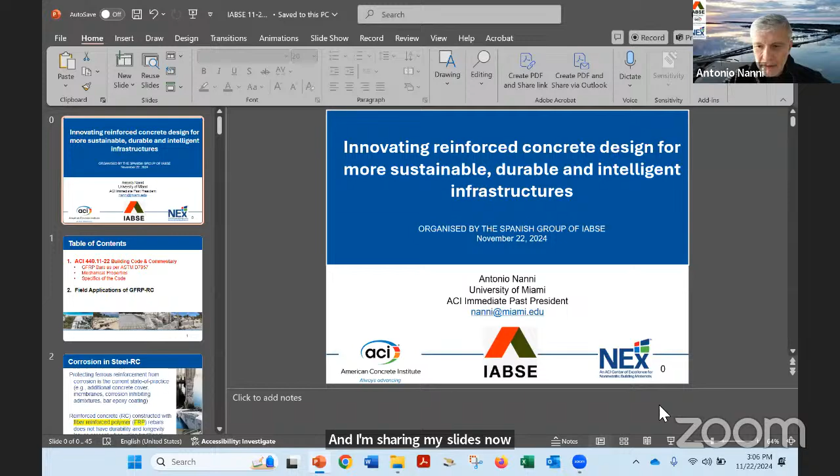The topic that was assigned to me is to speak a little bit about the international perspective, and I will do that by touching two topics. One, the code itself, ACI 440.11-22, and then to speak about some of the field applications that I think are representative of case studies that could be useful to the audience today.

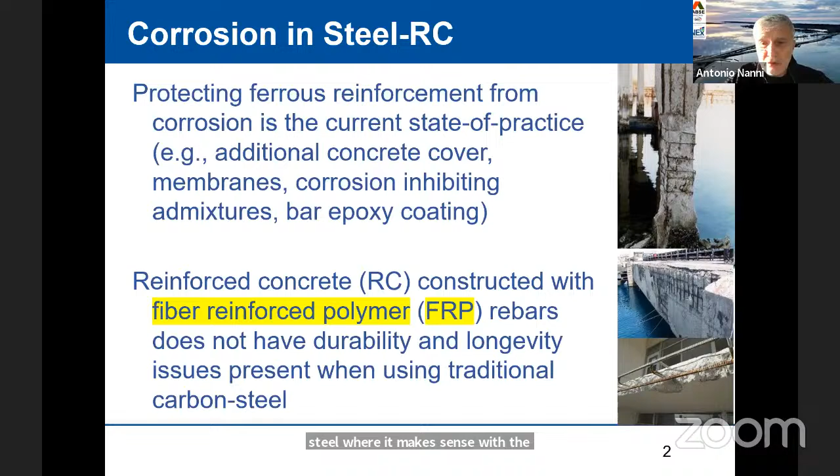So why do we use FRP? The obvious reason is we have been trying to protect the steel reinforcement in different ways. And you see them listed here: concrete cover, membranes, corrosion inhibiting admixtures, covering the bars with epoxy. But now the idea is, let's solve the problem at its origin. Let's replace the steel where it makes sense with the composite reinforcement so that the durability and longevity issues are addressed.

Where are the most interesting applications of these materials? Obviously, when there is corrosion due to chlorides, also when the concrete has a low pH, and certainly in structures where the minimum concrete cover could be reduced. This is, for example, an interesting application in the precast industry.

There are two other fields of application that may not be of great interest to the audience today, but are worth mentioning. The first one is where we require electromagnetic transparency, for example, in MRI type of application. Certainly when we require thermal non-conductivity, again, if we look at the precast industry, this could be of interest in the area of panels, where we want to avoid thermal bridging. And finally, in the geotechnical applications where we have the soft eyes in the walls where the TBM, the tunnel boring machine, needs to start the excavation.

Today, we will focus really only on one type of FRP, and in particular GFRP, glass fiber reinforced polymers. And in this particular case, we refer to two types of constituents. The first one is the fiber itself, which is E-CR. So is the traditional e-glass with the formulation to be more corrosion resistant. And the resin is a vinyl ester, a thermoset that has demonstrated over the course of the years a satisfactory, more than satisfactory performance.

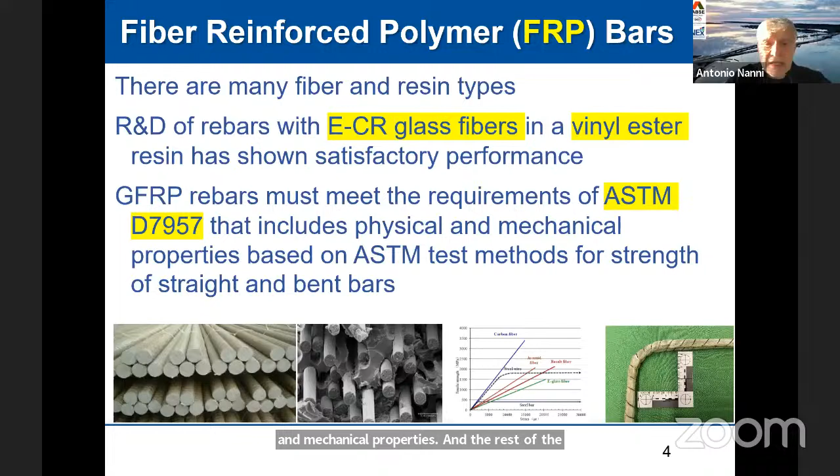Why the selection of these two materials in particular is because in the code that I will mention in a little while, we make reference to a material specification in ASTM, and in particular, as you see here, ASTM D7957. So the performance of GFRP bars is specified both in terms of physical and mechanical properties, and the rest of the conversation today, at least from my perspective, is related to this type of composite.

The GFRP bars have been around for quite some time, I would say more than 30 years. They also started with e-glass, now we are at E-CR. We started with the polyester, now we use vinyl esters. And the reason is because we are paying a lot of attention also to the durability. What is interesting, and you can see in the pictures on the right-hand side of my slide, is the shape of these bars.

Unfortunately, we have not arrived at a standardized configuration. And so you can see different surface profiles. They could be helically wrapped, ribbed, sand coated, grooved. And the reason is obvious. We are all reinforced concrete people. We understand that there has to be a bond between the reinforcement and the concrete for the transfer of stresses. And therefore, this is a key issue. Every manufacturer does it in a slightly different way, but we have to ensure the quality of the bond, and this will be one of the test methods and limits that the ASTM D7957 provides.

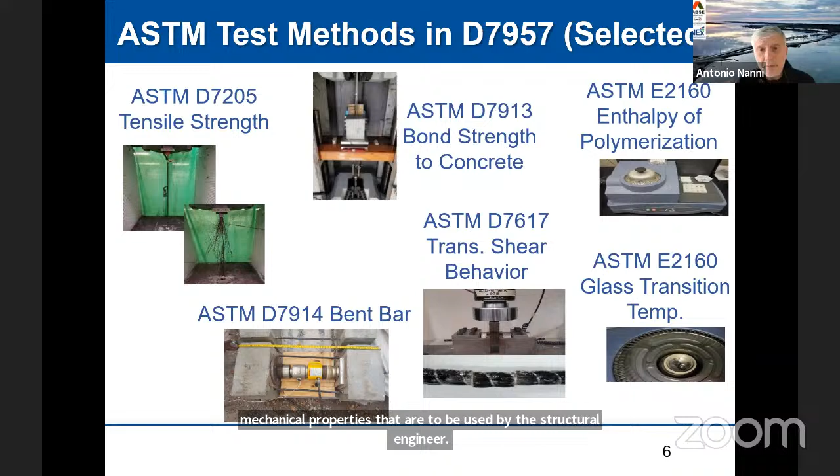The test methods that are indicated in the D7957 are various, and here you can see a selection. Starting from the left-hand side, the tensile strength that gives us the ability not only to determine the capacity in tension of these materials, to the far right, where is a test that maybe civil engineers are not very familiar with, which is the enthalpy of polymerization. So these are all very important tests to determine not only the mechanical properties that are to be used by the structural engineer, but also the physical mechanical properties that guarantee the quality of the reinforcement.

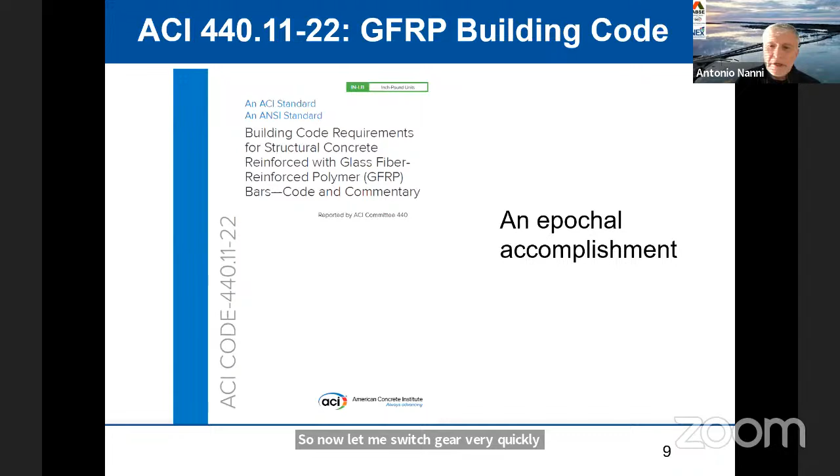So now let me switch gear very quickly to the building code. We consider this an epochal accomplishment. We published this in 2022. I know that the audience today is primarily more interested maybe in bridges and structures as well, but I think that the reference to this code is important because it's really written in mandatory language and is adopted also by IBC, the model code International Building Code.

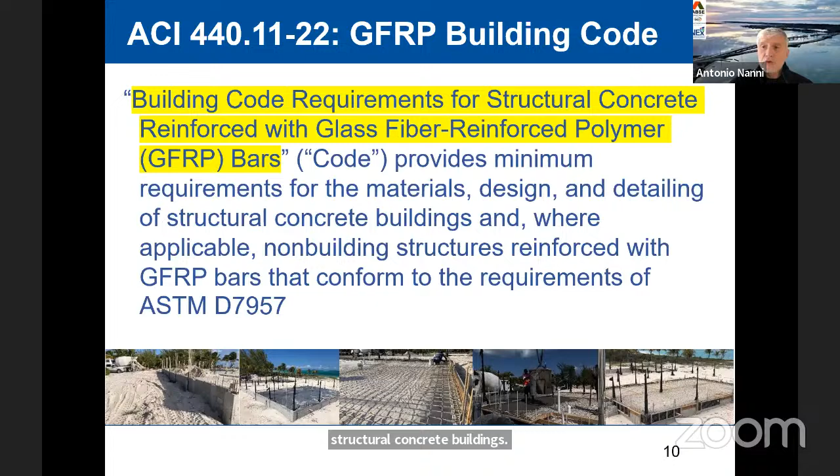Materials such as GFRP composites are linear elastic to failure. They certainly are not elastoplastic like steel, and therefore their application in seismic zones due to the ductility is an issue that needs to be addressed. And the way that we do it in ACI, but I would say not only in ACI, but the Canadian standards as well as others, is to address this from a perspective of deformability, that we define as the ability of a member to undergo large displacement prior to failure.

If one day you wish to attend a webinar where we go into the details of what this means in terms of design, I will be delighted to help you with that.

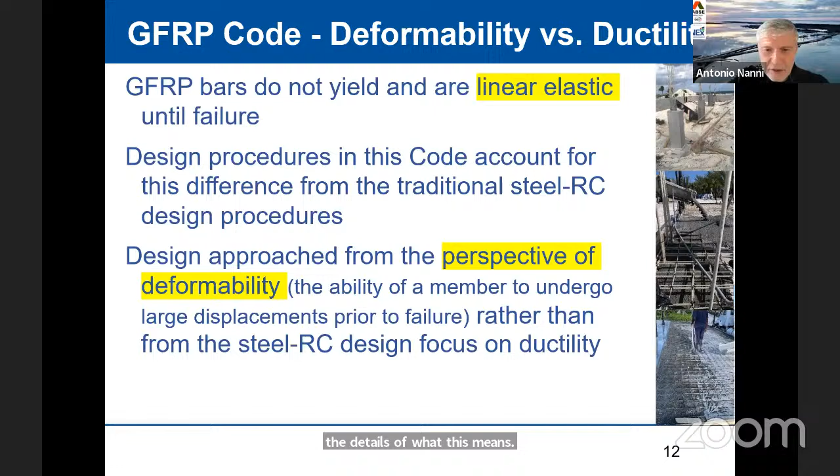And the other thing that you need to recognize is that the serviceability design takes a primary role also in the use of GFRP-RC, because the modulus of elasticity of these bars is between 1/4 and 1/3 of that of steel. And this has implications, particularly on deflections.

So with this, it took me just about 10 minutes to finish my first topic. I want to take you through some field applications. I selected 4 that I think are representative of what has been done in the last few years.

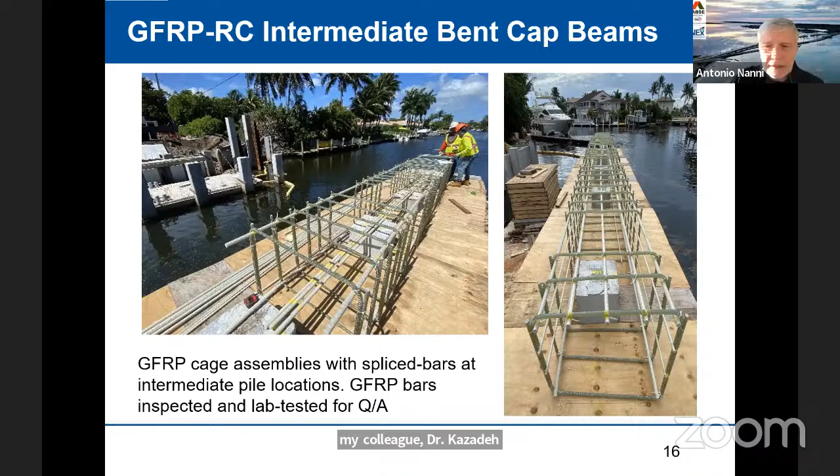Here you see the complete assembly of the cages, the casting completed for the pile caps. In this picture, particularly paying attention to the right-hand side, you see the GFRP reinforcement for the continuous flat slab. This is the first case. We typically have designed bridges that were simply supported slabs or girders. In this case, it's just a continuous flat slab.

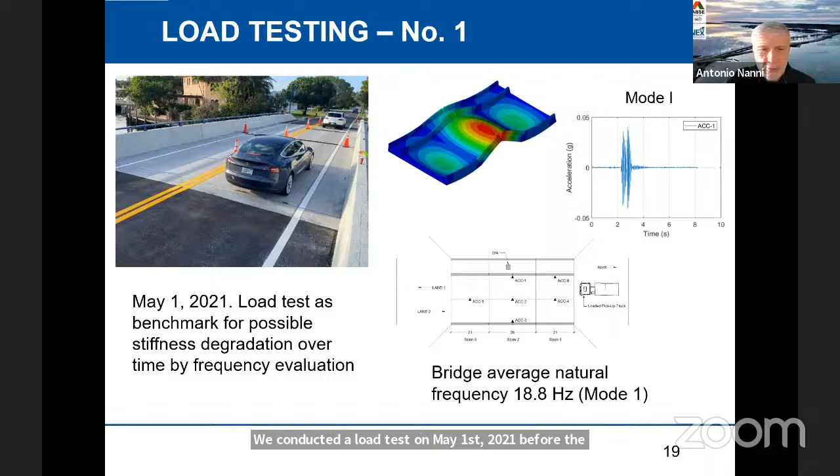The role of the university was complementary to that of the designer and the contractor. We conducted a load test on May 1st, 2021, before the bridge was open to traffic, to benchmark the stiffness of the bridge.

We conducted a test after 1 year and after 3 years. You can see the results here. Fundamentally, the natural frequencies of the bridge have not changed over the period of 3 years. So there is really no deterioration of stiffness, and therefore, even through visual inspection, we could not see cracks in the slab.

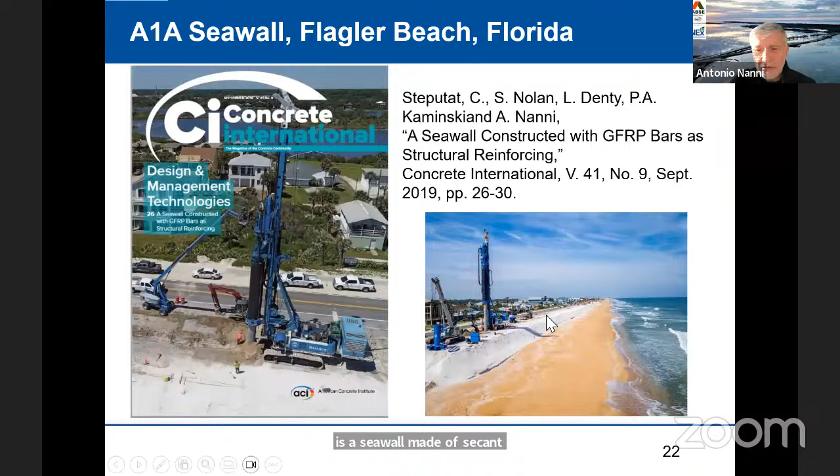The other field application is also in Florida. This is published in Concrete International. It's a seawall made of secant piles. Very exciting project. You see a picture here on the right-hand side of the job, almost completed.

The reason this is very important to us and the people in Florida - look what happens to Flagler Beach when the hurricanes come. And A1A, the highway you see here with all the traffic on the left-hand side, is an evacuation route. So it's very important to have it functioning after an event, or even before an event.

So these are the secant piles. Approximately 5,000 foot of seawall was built. At that time, this was the largest GFRP project in the country, over 1.5 million linear feet of GFRP bars. If you want them in meters, just divide it by 3 and you get a sense of the length of the bars.

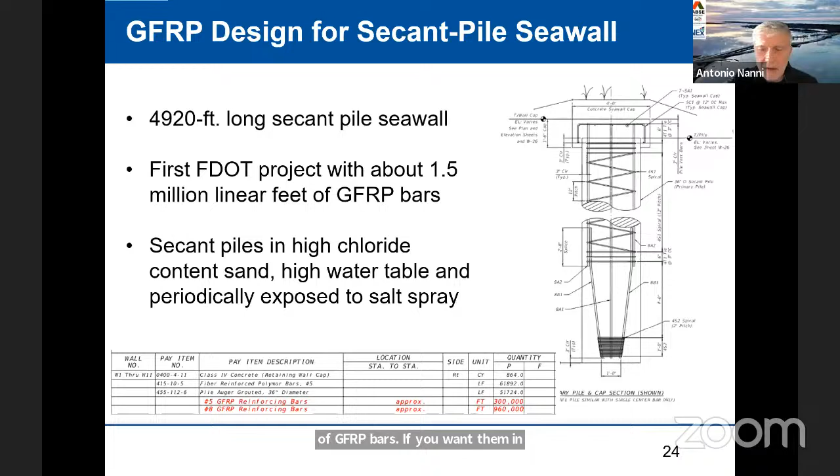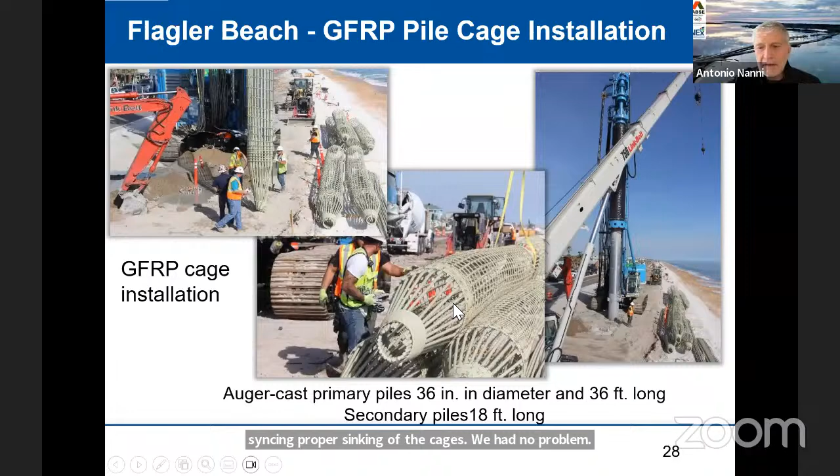There were concerns about the potential proper sinking of the cages. We had no problem, and actually our recommendation in the future is to avoid the nose, which only complicates construction but really doesn't serve any purpose.

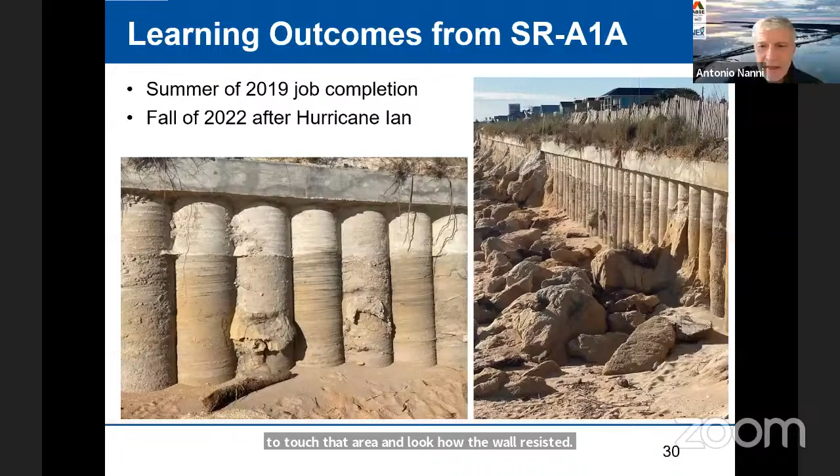The job was completed in the summer of 2019. In fall 2022, Hurricane Ian decided to touch that area, and look how the wall resisted. Extremely excellent design, and there was no impact on A1A nor the inhabitants.

The next project takes us to the Middle East, in particular Saudi Arabia. This is also published in Concrete International. This is one of the largest concrete structures, at least at that time. It was completed in Saudi Arabia in 2021. It's a flood mitigation channel around the city of Jazan. This is a city that was just being built.

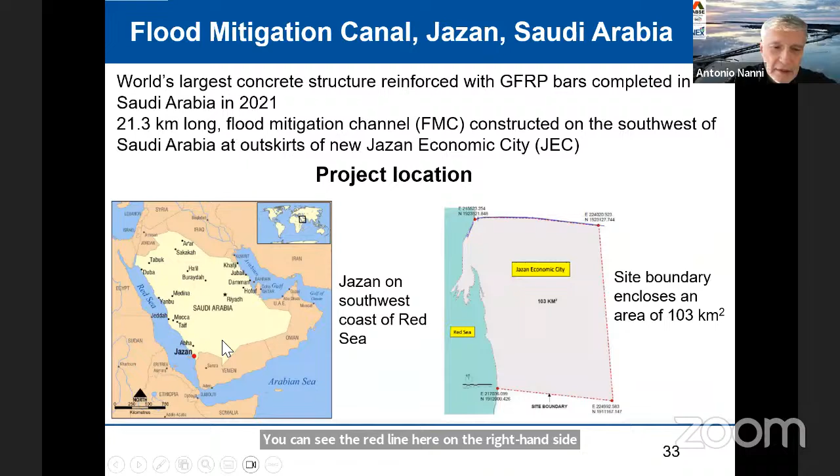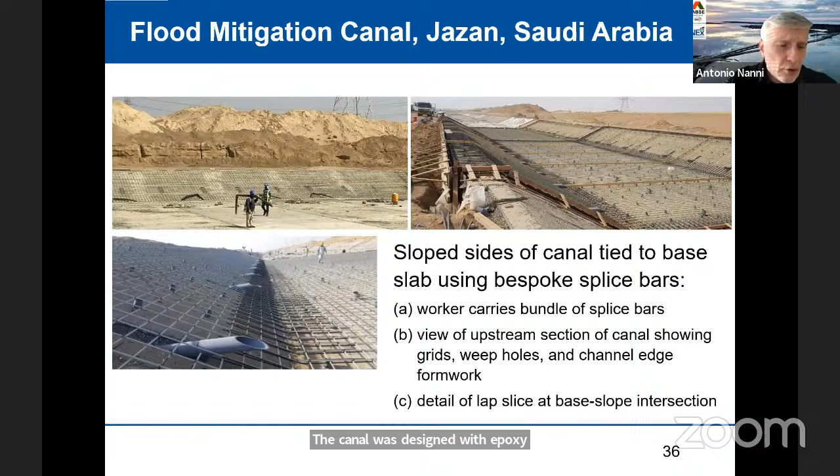The canal was designed with epoxy coated steel, and eventually the owner decided to switch over to GFRP rebars. Casting was done mainly at night because of the temperature - not only is it more convenient for the workers, but also for the curing of the concrete, avoiding shrinkage cracking.

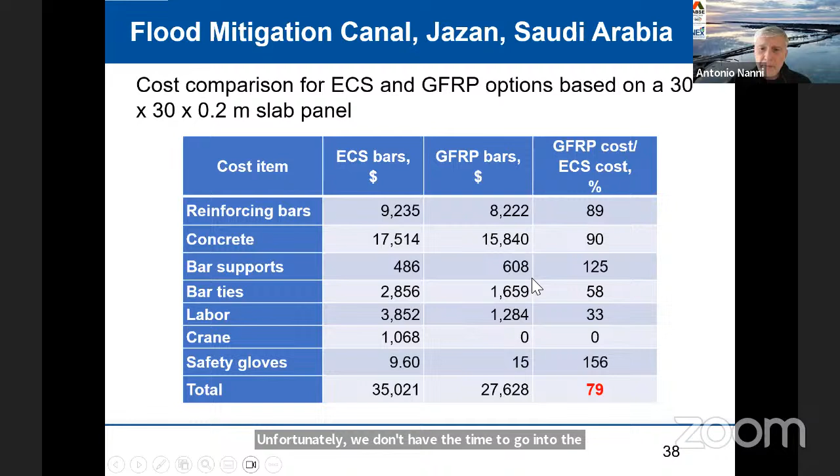This slide is only to give you an idea of the cost. There were 21% savings compared to the use of epoxy coated rebars. Unfortunately, we don't have time to go into the details, but the point I want to make is very simple: the cost of a GFRP structure would not necessarily exceed that of conventional steel.

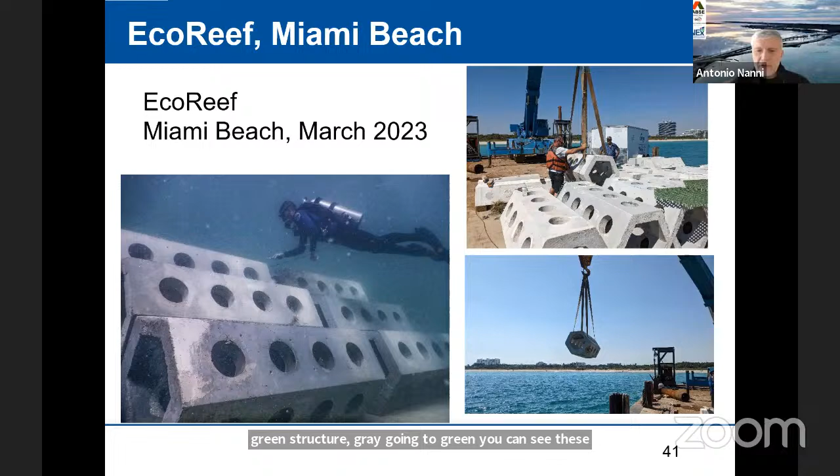These elements are called sea hives, made with special concrete. They are what we call a green structure, gray going to green. These elements were studied at the University of Miami for dissipation of energy. But I want to give you an idea of what happened after just 6 months from application of the structure. It has become an oasis of fish, and in only 6 months you can see the population.

So with this I can go quickly to my conclusions. I think I've made a compelling argument about sustainability and resilience. If we were to adopt this technology where it makes sense, we can also save fresh water. We have major projects now looking at the use of seawater to replace fresh water in concrete, and natural resources including sea sand, recycled concrete aggregate, and dune sand. We can eliminate corrosion, increase service life, and improve constructability by lowering transportation and installation cost.

First, very briefly, I'm a business developer for Owens Corning, a Fortune 500 company. We started producing glass fibers, and we are now in the business of insulation, roofing, doors, and composites. Within composites, the business is diversified across all applications where glass reinforcement is used, between wind power, veils, and composite rebars.

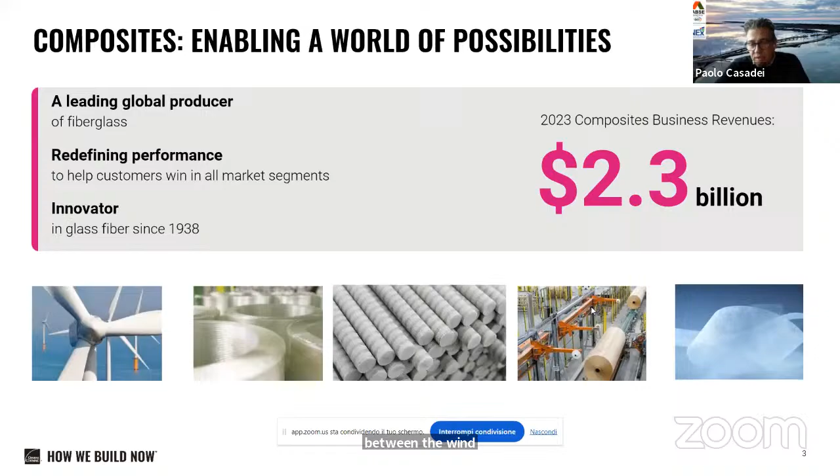When we look at composite rebars, it's a breakthrough innovation. Why? Because like Professor Nanni described, we talked about glass fibers, ECR glass, with a matrix of thermoset. There is also now an opening to new types of resins allowing thermoplastic resins, at least in Europe through the certification process, which could be very important.

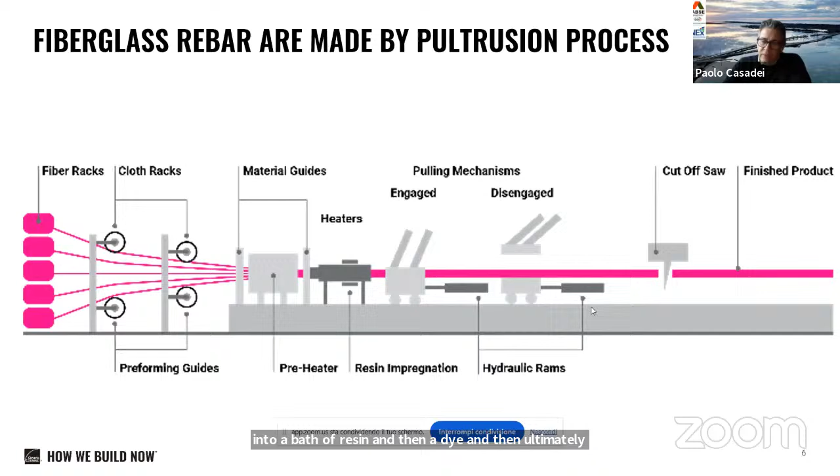Pultrusion is the technology mainly used in manufacturing rebars. You see on the left the starting of the spools, then you go into the matrix, into a bath of resin, then a die, and ultimately the cutting of the product. The only limitation in this product is really the transportation issue.

When we look into the shape, like Professor Nanni said, there are different ways. The material gets its mechanical properties from how much fiber you can compact into a GFRP bar, and the surface provides the bond. Here's an image of a product that performs really well in bond, in terms of mechanical adhesion to the concrete, which is ribbed. Then you have the resin that provides protection to the fibers for durability and allows the composite action.

There has been further development in GFRP production by adding a lacquering that provides protection against possible spikes of glass which can come out from the section of our GFRP bars. When we look at sizes, we can look at size and nominal sizes just like we do for steel. What's important to know, as mentioned before, is that when we look into bent bars, we cannot think like we do with steel - we are limited in the types of shapes and curvature radius of our bent bars.

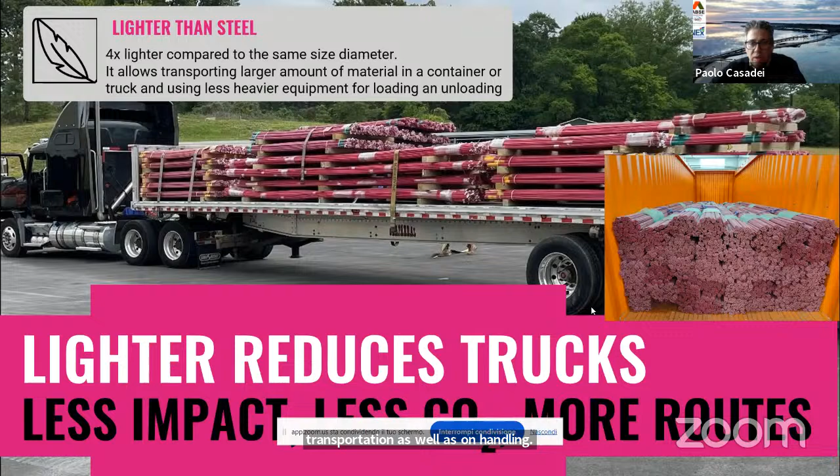Another aspect that has been mentioned, but I want to put your attention on it, is really the sustainability and life cycle assessment, the better life cycle assessment that GFRP can provide. Not only can we basically zero the maintenance, but also we have great advantages from the higher durability properties. Also, like Professor Nanni said, there is a big potential already explored on new types of cements, looking into fewer additives into the concrete.

We can certainly reduce the concrete cover because we don't have any more issues of durability. We only have the issue of being able to transfer the bond stress between the bar and the concrete. And also, we have the big advantage of being able to recycle the material at the end as aggregate for new recycled concrete.

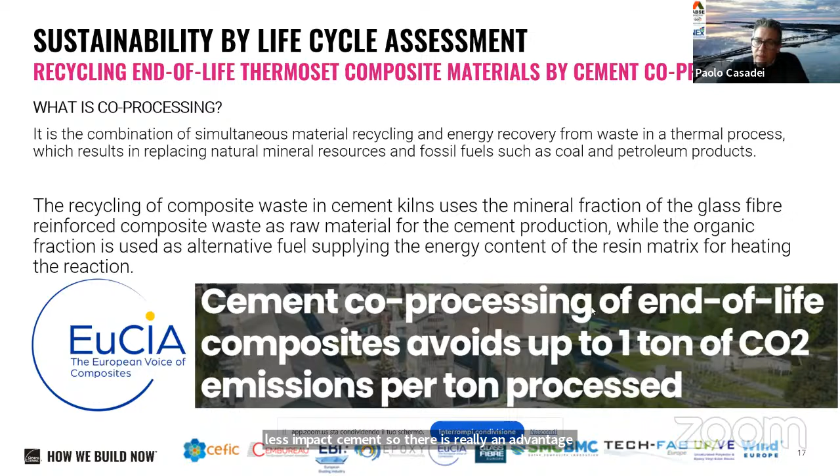There are also studies here in Europe by EuCIA where composites can become a way for manufacturing less impactful cement. So there is really an advantage in deploying the use of concrete with composite materials. So basically here is just a synthesis, a summary of these advantages.

Also, don't forget about the fact that safety comes first, and so by adopting a material which is lighter, not only do we have more sustainability coming from reduced truckload, but also we have a product that allows a safer environment in the construction world, in the construction job site, by the fact that it can be carried by hand more easily, so the job site becomes faster and fewer injuries happen on the job site.

Here, let me give you now some very brief added points. In terms of handling, cutting, and tying, we talked about handling, the fact the material is lighter. And so clearly, you can see here from the picture, there is an advantage in using this product on the job site.

Cutting becomes much easier because with a normal blade, you can cut the material even in multiple size bars, no sparks, and no safety issues. And as far as tying, really, the material can be tied in any traditional way. You can use plastic ties, but also traditional ties. So really, the approach to the job site is much similar to what traditionally happens with steel.

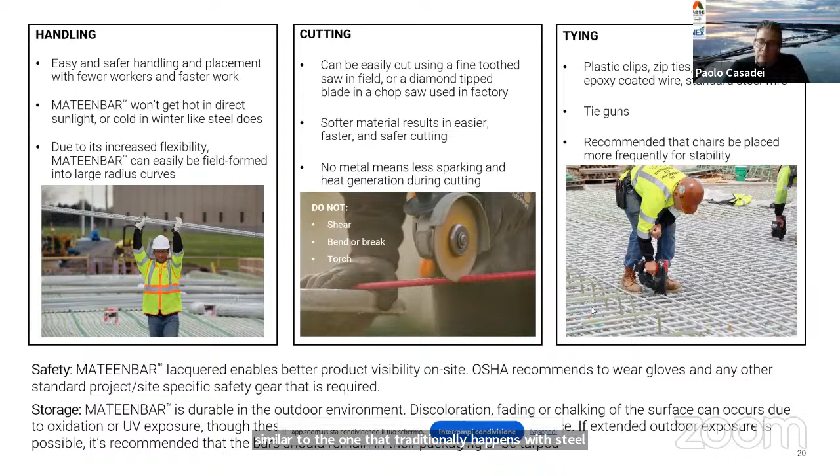Clearly, the design is different, like Professor Nanni mentioned, but we need to think about the rest as staying pretty much the same. Here you see kind of an overview, a zoom of the guy carrying four 6-meter-long 20mm bars. Clearly, that would be something not doable with traditional standard material like black steel.

Here you see a picture of the ties. Again, very similar to what is usually done with steel, no difference.

Now, just to give more voice to the application, here we can think from the most complex application to also the most traditional ones, like driveways and slabs on grade, where again we take the advantage of reducing the concrete cover and handling the material in a much easier way compared to standard steel.

Here is a slab on grade. Again, you see the construction worker carrying many bars, easier to carry, easy to install, with the big advantage of not deteriorating and zero maintenance over time.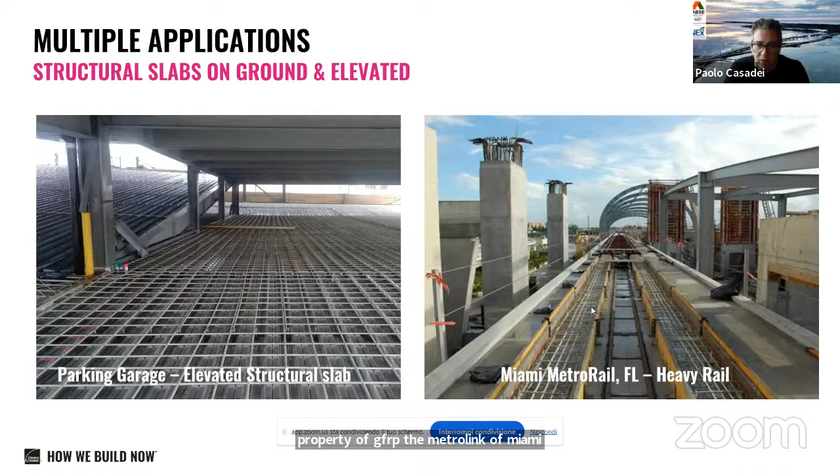Here, applications where they take advantage of the electromagnetic property of GFRP: the MetroRail of Miami, or elevated structural slabs in a parking garage. Applications in seawalls and decks, like already mentioned.

Here is a canal, and before going into the code, I just wanted to look at this project that is also the background of our conversation today, which is Harkers Island Bridge in North Carolina. I want to thank Balfour Beatty, the contractor, for having passed the pictures. This project represents the first bridge ever built worldwide fully reinforced with only FRP materials.

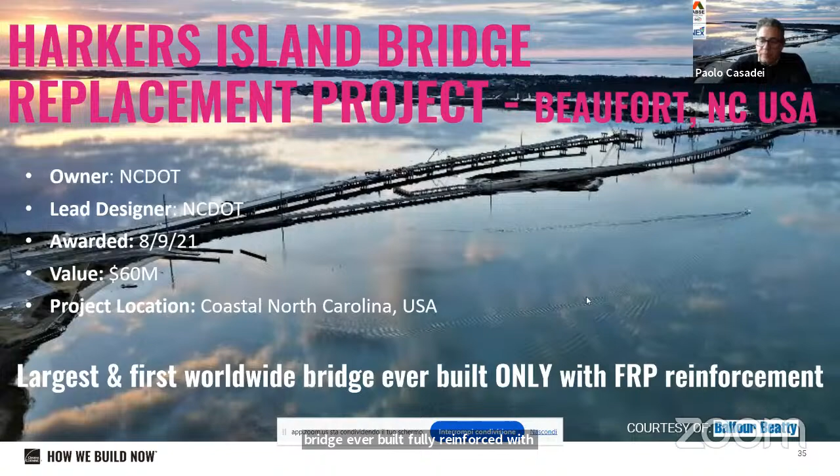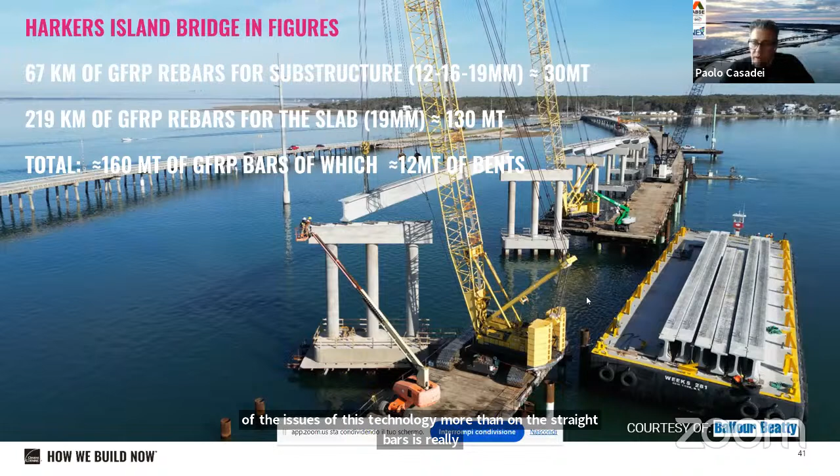And again, just a few numbers: 67 kilometers of GFRP bars for the substructures, roughly 30 tons, 130 tons for the slab, and also 12 tons of bends. Now, if we really want to understand one of the issues of this technology, more than the straight bars, it is really the amount of bends. And that's really where we should put our efforts to improve.

Now, let's go very briefly into the code approval: how can we certify the mechanical properties of this material? One aspect that has been really important for this technology is delivering certifications, which have already been done in North America and Canada, like Professor Nanni said, not only as compliance, but really to guarantee the mechanical properties over time.

That's what has been done in the US by ICC-ES, developing an acceptance criteria that not only certifies the bars but also provides assessment and verification of constancy of performance. In Europe, this task has been deployed recently by the development of the EAD, the European Assessment Document, which defines how carbon, glass, basalt, and aramid fiber bars can be used in concrete.

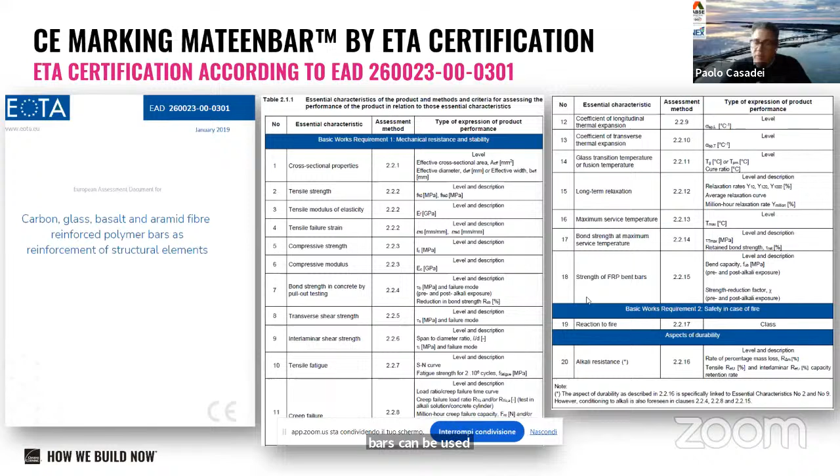Here you see a list of all the mechanical properties that have to be defined. The most important thing for a producer, but really for the engineer who decides to adopt this material, is that once the material is CE certified, there is an assessment and verification of constancy of performance 1+, which means the highest level of verification and constancy of the product within CE marking. This guarantees that the material properties certified by the manufacturer will be maintained throughout production, thanks to a factory production control done at the beginning of the certification and issued yearly.

And here you see on the right the mechanical properties and the properties in general of the product that need to be controlled and verified every year by the manufacturer, and also randomly verified by the technical assessment body that delivers the certification. Here you see some of the mechanical properties. Glass transition temperature has to be above 100 degrees, very similar. We have clearly tried to match some of the compliance parameters present in the ASTM.

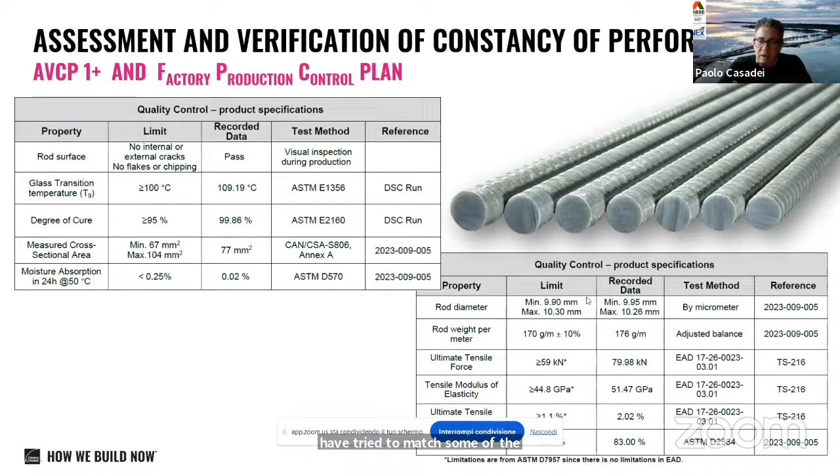The big difference between products certified according to the EAD versus the ASTM is how we determine the mechanical properties. In the EAD, the manufacturer has to refer the mechanical properties to the cross-section measured by the Archimedes test, which means that in Europe we are not going to have mechanical properties raised by referring to the nominal, but only to the measured cross-sectional properties. So an engineer approaching the design of this material is going to see slight differences depending on which part of the world they're in.

Like Professor Nanni said, there is a pull-out test. In the standard, there is also the opportunity of doing an eccentric pull-out test, and a pull-out test after conditioning the bars.

And the other very important thing is that this test does provide a level of performance of the bar, but the values that need to be adopted in the design shall not be taken specifically from this test, because with 5 times the diameter, clearly we only have a reference of the performance of the bar, but this value does not really enter into the design.

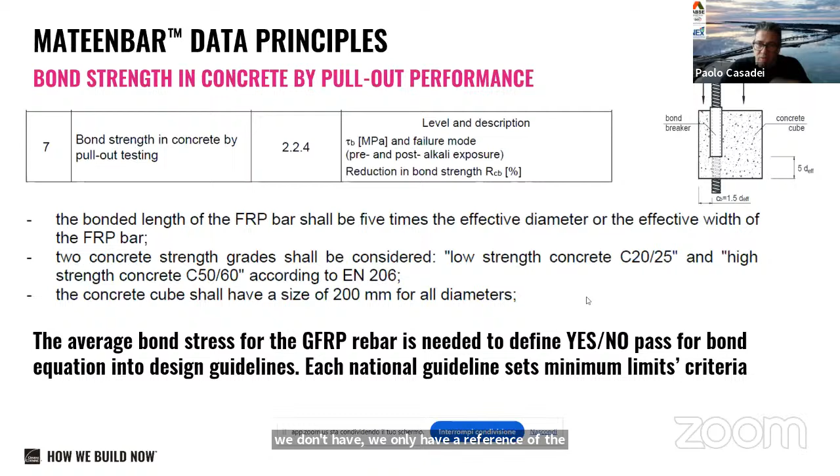Also, this is another very important question regarding bent bars. Like we said before, one limitation of this technology is given by the fact that we cannot bend GFRP bars on site. GFRP bars have to be manufactured separately in production. Usually the radius of curvature of these bars is roughly 5 to 6 times the diameter. Clearly the manufacturer is allowed to provide a lower curvature radius of their bar as long as the minimum mechanical properties listed in the code meet the specification.

Usually, the strength of the bend has to be greater than 50% of the straight bar. There is an evident reduction in the performance of GFRP bars. And again, this is the limitation. It's nothing bad, but we need to know these limits, these different performances, in order to design our concrete section more efficiently.

Another important thing, which again has to be known: the testing that we need to perform on our bars provides us the necessary level of trust in the material. GFRP bars suffer alkali exposure. And somebody may say, well, we're using it in concrete. Concrete is an alkali material. So how do we do? Well, we simply test and we demonstrate that after 3,000 hours, there is a reduction in our properties less than a certain percent, and that is defined by the code.

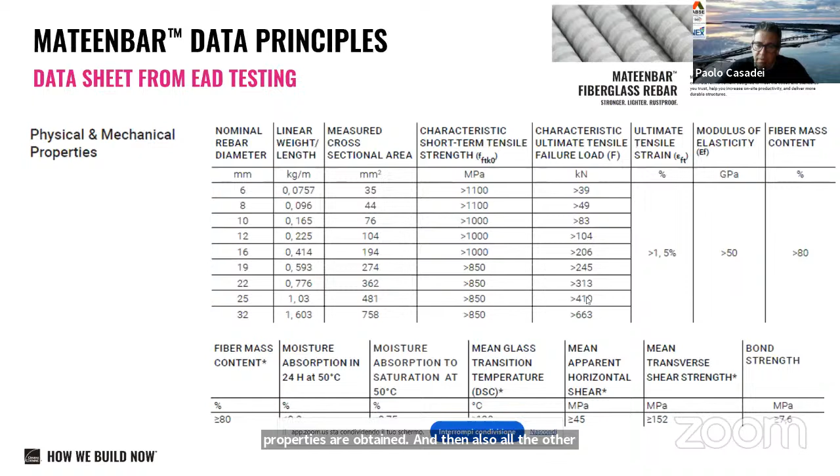And this is just a picture, very briefly, of a mechanical property data sheet where you have the nominal diameter, the linear weight, the measured cross-sectional area, characteristic short-term tensile strength, the load, the strain, the modulus of elasticity, and also the fiber mass content, which gives us really a flavor of how the mechanical properties are obtained, and then all the other parameters which are important for qualifying the product.

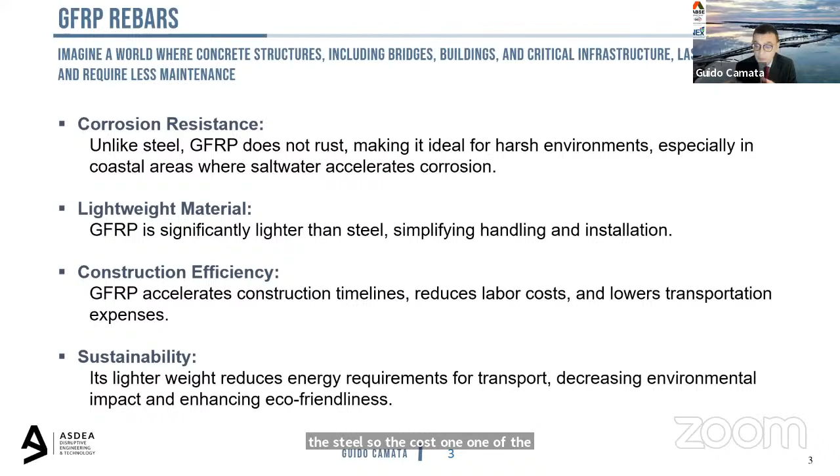So first of all, a lot of the previous talks talk about the corrosion resistance of the material. It's corrosion resistant, it's lightweight, Professor Nanni mentioned it, it is efficient in construction, and it is sustainable because it's much lighter than steel. One of the largest costs for sustainability is transportation, and in this case you can also save a lot of problems. So what is the drawback? And this was also the question.

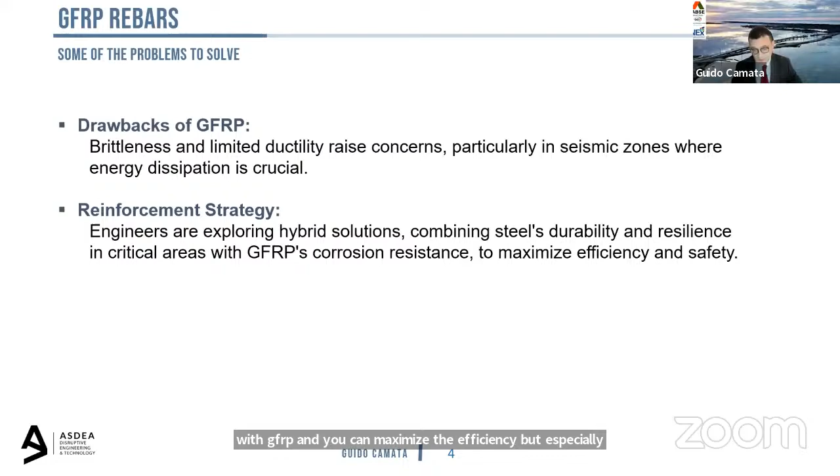One of the drawbacks of GFRP is mainly the brittleness and the limited ductility. This raises a lot of concerns among engineers in general, but particularly in seismic zones, where you require a lot of dissipation. So I'm going to show some examples of how we can prevent this problem when you have a medium to high seismicity place, and you also need to combine this with different materials. I'm also going to show a reinforcement strategy where you can mix steel with GFRP and maximize efficiency, safety, but especially ductility of the section, while also ensuring the durability of this type of section.

I start with an interesting test that a lot of people were involved with. I just want to mention Professor Fausto Mistretta, who was the designer. I was a consultant for the test setup and also for the numerical analysis. And Manini Prefabbricati was the builder. I think that's the largest test that was performed on this type of structure. It's a 23-meter pre-stressed bridge beam. And I'm going to show the idea, which I think is quite innovative and interesting.

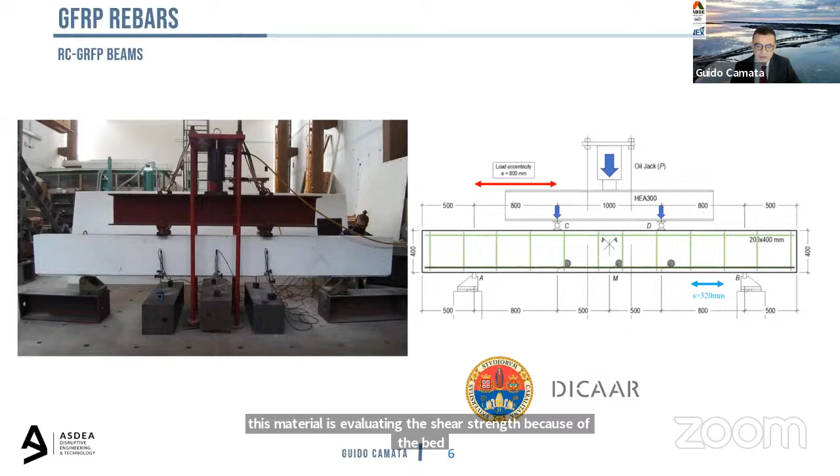But before, I start with some simple tests made at the University of Cagliari. The University of Cagliari started an extensive campaign to evaluate the shear strength of GFRP sections. They performed several tests with only a GFRP cage. Like Paolo was mentioning, one of the most interesting topics for this material, I think, is evaluating the shear strength because of the bend, so the reduced strength of the bend. It's a very interesting topic, and we are currently working on it. You see, this is a cage completely made of GFRP, and you can see the stirrups bend. That's, as I said, a very important issue.

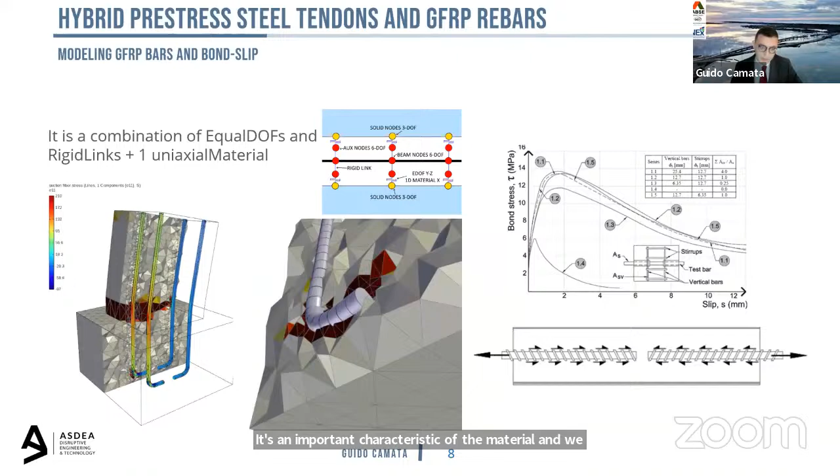We try to model these beams with very advanced numerical models. In this case, we also used bond slip because, like Paolo mentioned, it's an important characteristic of the material. We also need to model the bend, as I'm showing, to see the effect of the bond stress, but also the effect of the bend on the performance. And we use a sophisticated damage concrete plasticity model to consider the behavior of concrete in tension and compression. You can see the damage plastic behavior in compression at the top and the tension behavior at the bottom. As you can see, we can model the plasticity and also the damage.

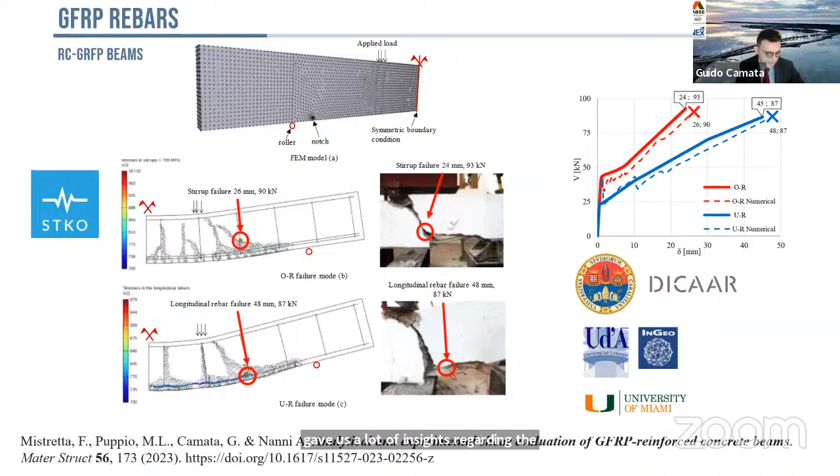That's the first result, and it was a blind test. We wanted to evaluate if we were able to reproduce the shear strength. It was a 4-point bending test; as I said, we performed several. As you can see, we can also model very accurately the bond slip, the loss of anchorage of the GFRP rebars, and the shear failure. These models are able to reproduce the experimental results quite well: the numerical is 90 and the experimental is 93. This gave us a lot of insights regarding the stresses on the rebars, and especially the stresses on the bend, which, as we said, is the most important thing to evaluate.

And we could obviously also consider the strut in compression and see how the strut is behaving, to see if the typical model using the modified compression field theory, taking into consideration the truss with different orientation angles, also works with this kind of material.

Instead, with Manini, we tested a solution with the designer that is very interesting, because the idea is to use the pre-stressing tendons at the center of the section. In this case, you ensure 10 centimeters of concrete cover, so you have extensive protection also against carbonation. And the external reinforcement is all made of GFRP. So think about the advantage: you have the same type of ductility from the pre-stress, but at the same time way longer durability, because the GFRP is external and only the steel is internal.

I think it's a brilliant idea for bridges, bridge decks, and bridge girders, and even for slabs it could sometimes be very efficient. This is a picture from Manini of the construction. You see, it's a huge beam, as I said, real scale.

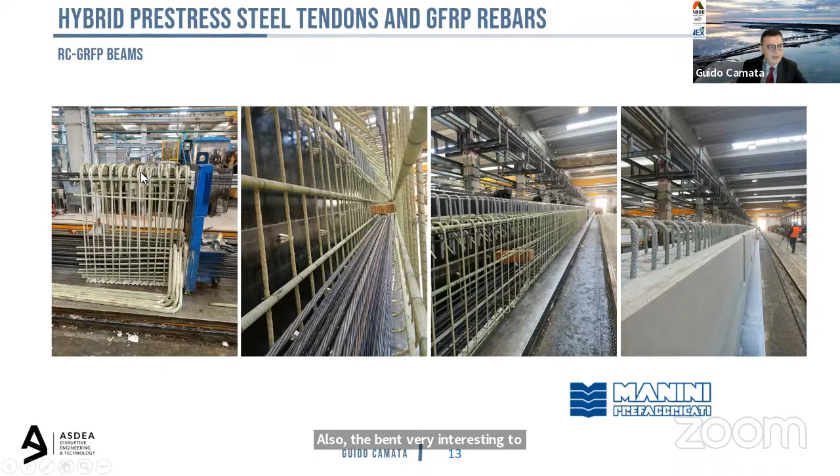And nothing to say. As you can see, the distance between the stirrups is very short, but as you can see, also the bend. Very interesting to notice how it is, because the bend can guarantee a good bond. So this is a model that we developed. You see how it's very sophisticated, because as I said, we wanted to see also the behavior of the bend to ensure that everything was working properly.

And then we would check after the test the bend strength. And in this case, it was also interesting that Manini decided to go up to failure. And they asked us to do first the blind predictions. So without having the results, we had to predict the strength. We first performed a 4-point bending test of flexure, and we wanted to evaluate the stiffness of the beam and also the cracking pattern. And then later we performed 3 shear tests.

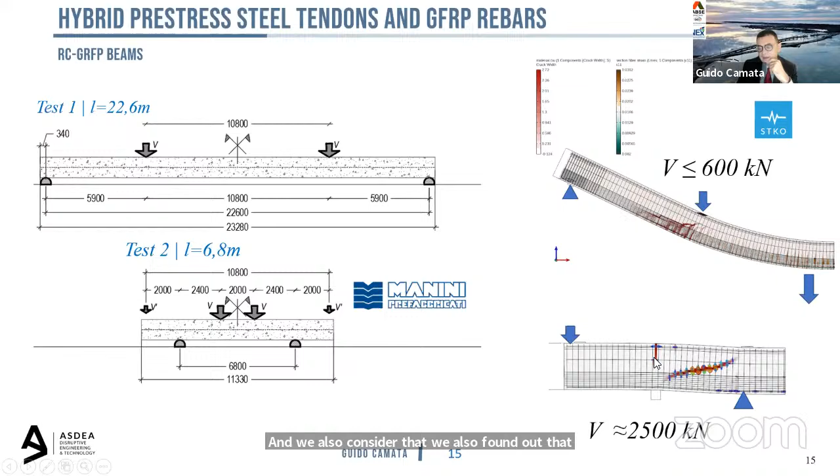I'm going to show one, and we evaluated the shear strength to 2,500 kilonewton. And we also found out that probably the tendons were going to yield first. So we would have some ductility in the response, and then the shear failure, as you see, the diagonal shear failure. That was the response of the test in flexure. You see the numerical model reproduced very, very well the test. And we are quite satisfied by the calibration of the model.

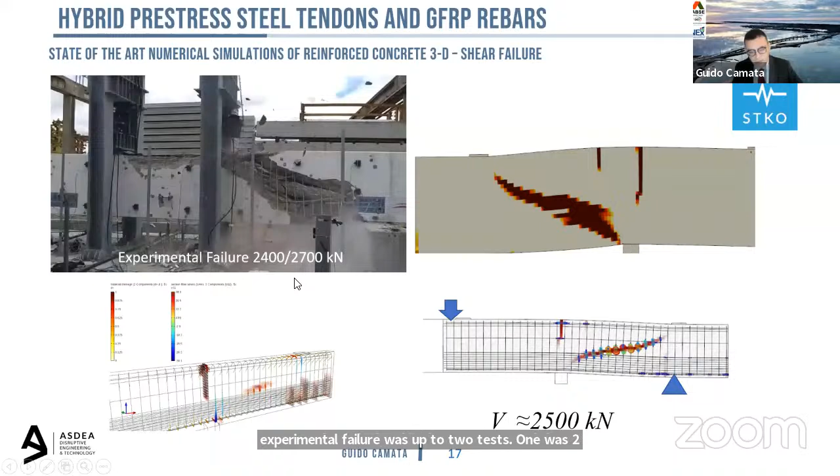And then that's very interesting, I'm showing you the predicted failure and then the failure that we obtained on site. As you can see, the model reproduced perfectly the test. And we could evaluate also, as I said, the stresses on the bend just before failure were way below the allowable strength of the bend in the GFRP rebars. And the experimental failure was from 2 tests. One was 2,400, the other 2,700. So the error was roughly 7%. So the models work very well to model this kind of structures.

Another idea is a new hybrid concept which combines the steel reinforcement with GFRP. And this was studied for seismic regions. I'm a seismic engineer, so I was also concerned about the ductility. And the idea is to use an internal cage of steel rebars. The steel rebars are perfectly connected, anchored to the foundation. So you can think about a joint, or think about a bridge pier, where you have the internal cage, and you can guarantee 10, 12 centimeters of concrete cover.

And all the critical region is designed with the steel reinforcement and also the confinement. So we can ensure large ductility because it's only controlled by the steel structure. The external cage instead works only for static behavior. In particular, as designed, the GFRP is not anchored to the foundation, so it's not working for seismic, it's only working for static load. So this will completely solve the problem of ductility, increasing the construction cost not much, but ensuring a huge increase in the durability of the structure, thinking, for example, of bridge piers or columns of external structures.

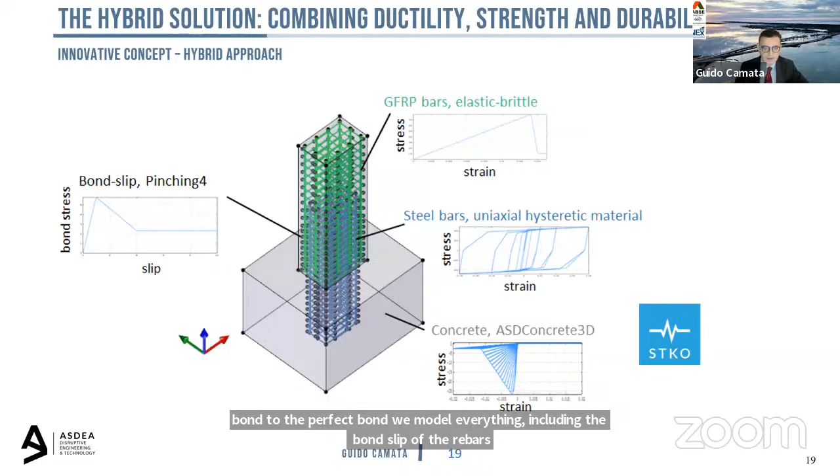So this is a numerical model. I want to show you the results. So here you can see the internal cage fully anchored to the foundation, and the external GFRP cage not anchored. So we are not even concerned about the bond of this kind of rebars because we don't need to guarantee the perfect bond. We model everything, including the bond slip of the rebars, steel and GFRP, and obviously concrete behavior and GFRP elastic brittle behavior. Look at the results.

And now with Professor Nanni and other professors, we are testing the solution. So we are very interested in seeing the experimental results of this solution. Another thing that I really believe is that for infrastructures, and especially for new structures like this that we are analyzing, it's important to monitor the performance of the structures in time.

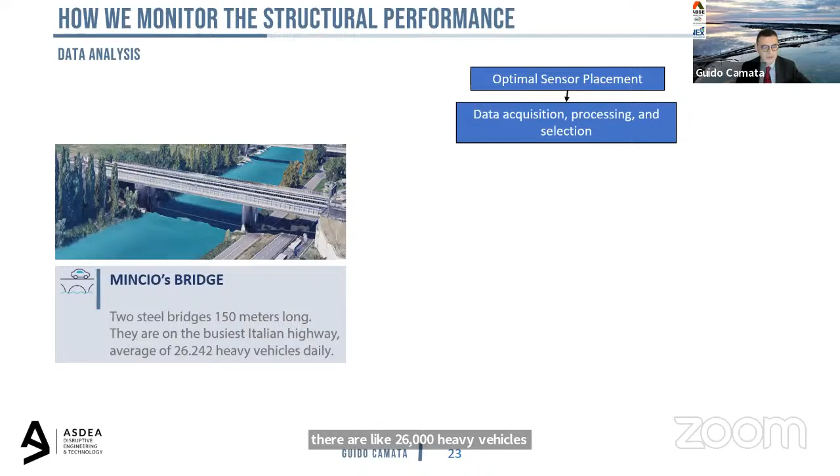I'll show you an example directly of a bridge. That's a very important bridge in Italy. There are like 26,000 heavy vehicles daily on this bridge. It's 2 bridges of 150 meters. It's on the highway A4. We instrumented it with 900 channels. So we wanted to have really large information of the behavior of the bridge.

And we are analyzing the bridge using artificial intelligence. In this case, I'm going to show you how we do it. But we also calibrated a digital twin. So we have a numerical model that is fully calibrated using artificial intelligence to the sensors. And we have also designed a data visualization to see the results from the web directly.

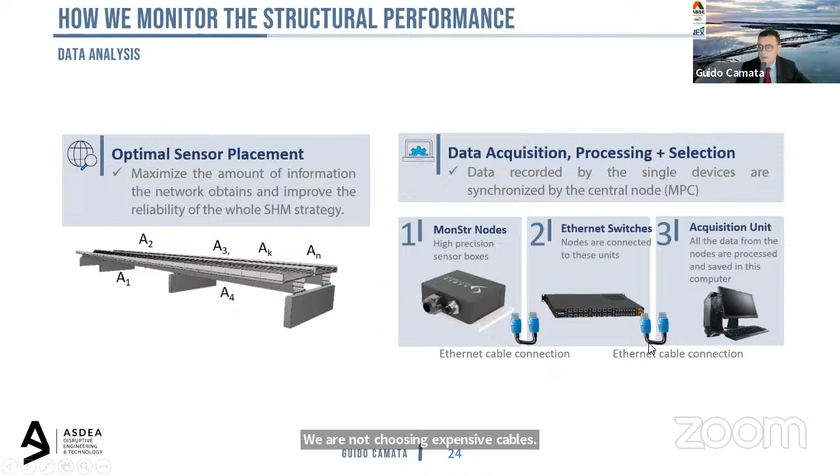So we use optimal sensor placement software using genetic algorithms to decide where to place the sensors. And we are using a data acquisition processing solution that is real-time, continuous. And we are using a quite inexpensive solution because we are not using expensive cables of a DAQ system, but just a computer with a normal Ethernet connection to evaluate the performance of the bridge. That's the result. And as I told you, for bridges made of GFRP, I think it would be crucial.

And we evaluate the behavior, the performance of the bridge using statistical data and artificial intelligence. So think about, we measure the performance of the bridge using a lot of different features. And then after 1 year, we detect that there are anomalies. It's like, just to give you an example, monitoring your heart rate during 1 year. And after 1 year, we can tell you if there is a different trend, if there are problems in your average heart rate, in your maximum heart rate, in your standard deviation.

So if there is a problem with your heart rate, we can detect it, and we do the same with bridges. So in the case of GFRP bridges, it would be very interesting to see if there is damage or cracking is exceeding, if there are some issues with the new solution. This is a training period that normally lasts for 1 year. And this is anomaly detection. After 1 year, you start detecting the anomaly on the supports or whatever happens in the bridge.

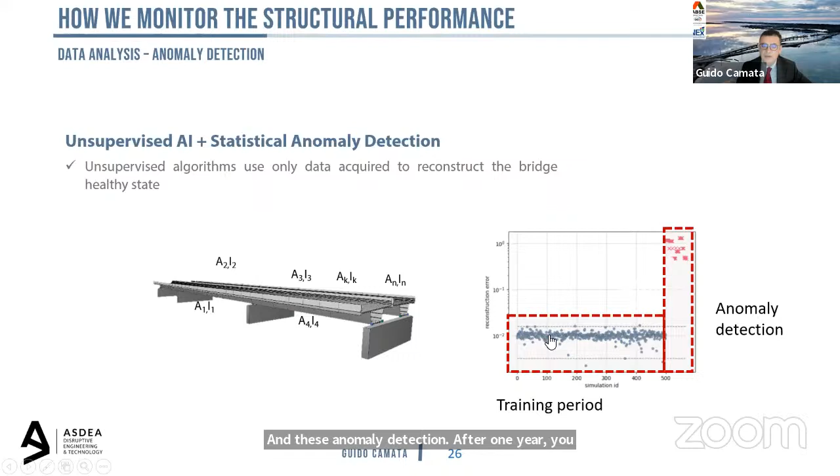For a new material like GFRP that's crucial, because basically just with artificial intelligence and digital twinning, we can evaluate, for example, the fatigue behavior of the GFRP and evaluate what is the life expectancy of the bridge, or whether we need to intervene and how to intervene if there are some issues with the bridge. So the prognosis capability is very high because of digital twin integrated with artificial intelligence.

And also what is interesting is the fact that we can also evaluate the performance, not only in service load, like what I was showing before, but also for extreme events. So we can run several earthquakes with different intensities and we can see the performance of the calibrated bridge for an earthquake. And then we can train the digital twin with artificial intelligence, basically evaluate what is the damage just after an earthquake. That's really interesting.

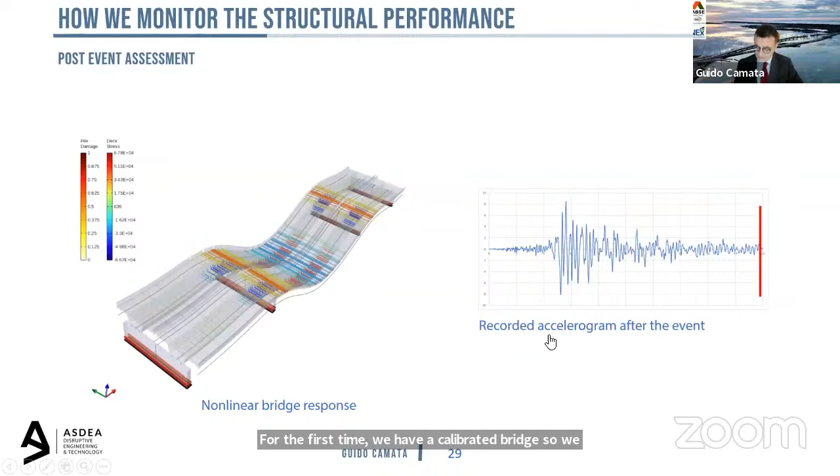And also what you can do, also not only controlling the system, but you can even reprogram the system, changing the frequency of the acquisition or changing the acceleration, maximum acceleration, minimum acceleration. You have control from the office.

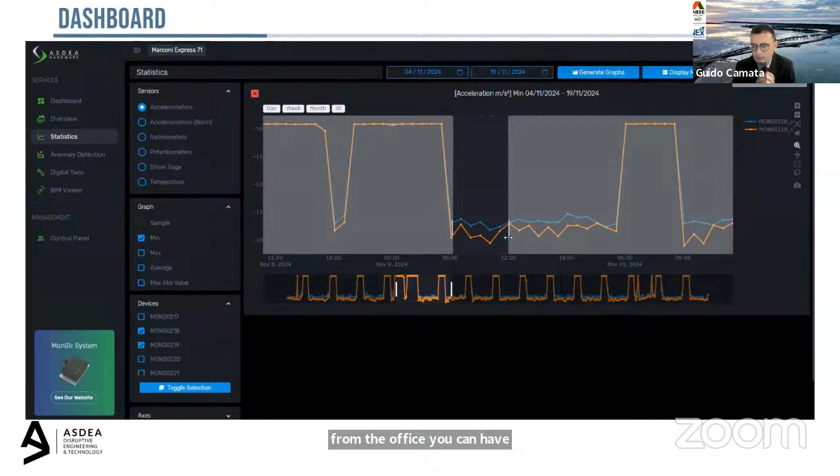You can have all the statistical data based on windows that can give you the trends of the bridge. Or you can use artificial intelligence in this case to evaluate the performance with the different anomalies that you can read and also elaborate. That's very important to see what is the anomaly.

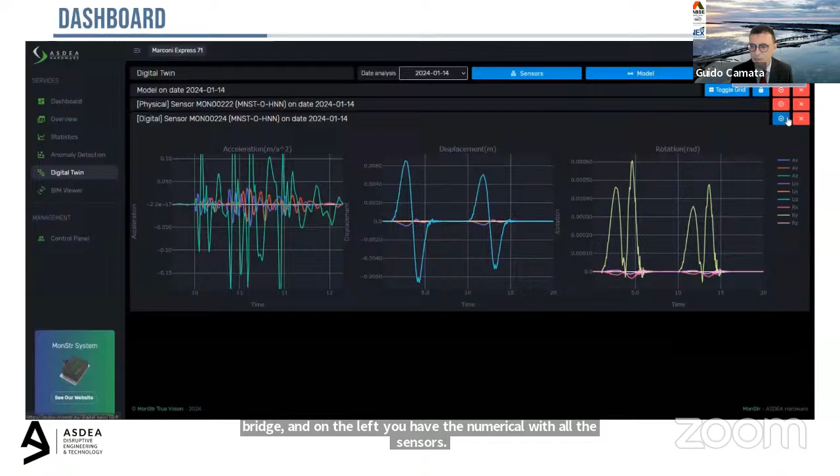Or you can have the digital twin. So on the left, there is the physical, the real bridge, and on the other side you have the numerical with all the sensors. In this case, it's very important because you can use information from the numerical model, the deformation of the bridge in real time, inclination, or we'll show you also the stresses of the bridge in real time, just coming from the information of the data of the sensors.

In this case, you have the modal analysis of the frequency. And at the end, you can also have a view of the BIM with the information regarding the sensors, all the information regarding installation, maintenance, and every information you need for the sensor.

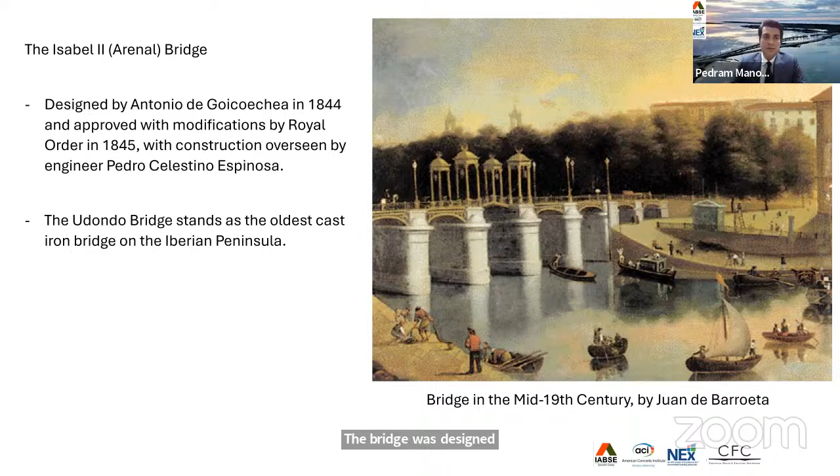Okay, the story of our bridge starts in 1844. This is called Isabel II Bridge, and this is the bridge that part of it will be reused in a new bridge. The bridge was designed and constructed in 1844, as I said, and it was in service until 1874.

This type of bridge is also important because this is one of the last remaining historical bridges called Polonceau bridges, after French engineer Antoine Remy Polonceau. Please excuse my French.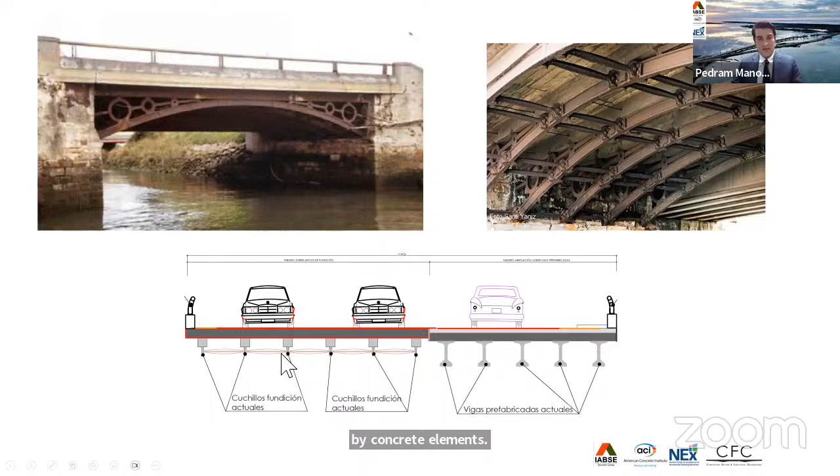The bridge is still in use, and on the figure below, you can see that it was extended by concrete elements, and these pieces are the old arches. So the bridge is quite old, and it lasted far beyond the design service life of any bridge.

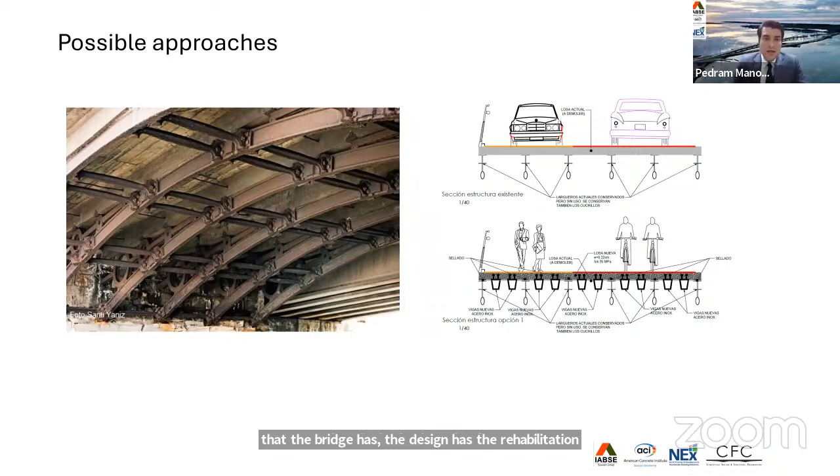So you can see that the situation is getting worse, and the city of Bilbao decided to start a rehabilitation process of the bridge. One restriction that the rehabilitation design has is keeping this space above the arch.

So there shouldn't be any interference with the old structure. To do this, we can use many solutions.

On the right side, you can see that steel elements are added, but this wasn't the best design that we liked. The disadvantage was that this is a heavy design, and adding heavy elements to the old masonry walls and abutments of the bridge adds weight to it. Also, it is a little bit crowded, with too many elements sitting in this very small gap.

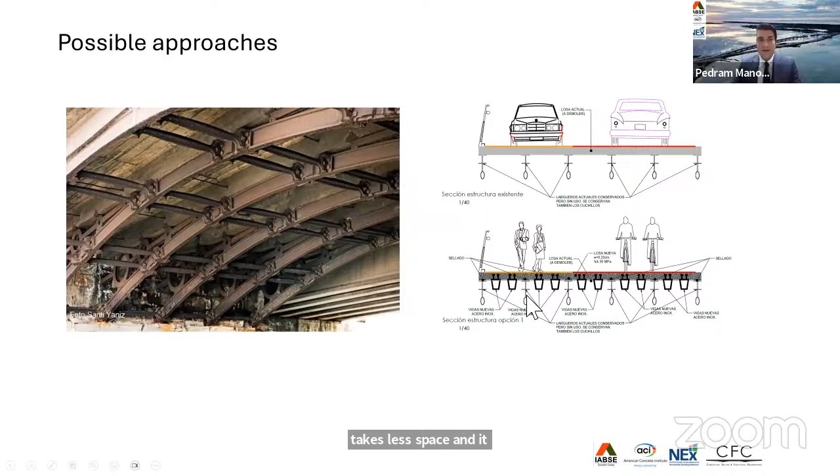So what is the better element to use here? What is a better design to do? What is a better material which is lighter, takes less space, and can replace the load-bearing part of the structure?

The answer, at least in this case, was an FRP solution called hand laminated U-shaped deck.

As you see in the figure below, the space remains after the installation of these elements. So the concrete cover on top will be removed, and this element will be replaced. The advantage is the higher strength of these fiber reinforced polymers. On the right side, you can see other examples of the process of developing this hand laminated composite decks.

Earlier examples of this, as far as I could find, were first done by Lockheed Martin in the 90s. They built a test bridge with this U-shaped girder design, and it was also continued in 1997 for Smith Road Bridge in the USA.

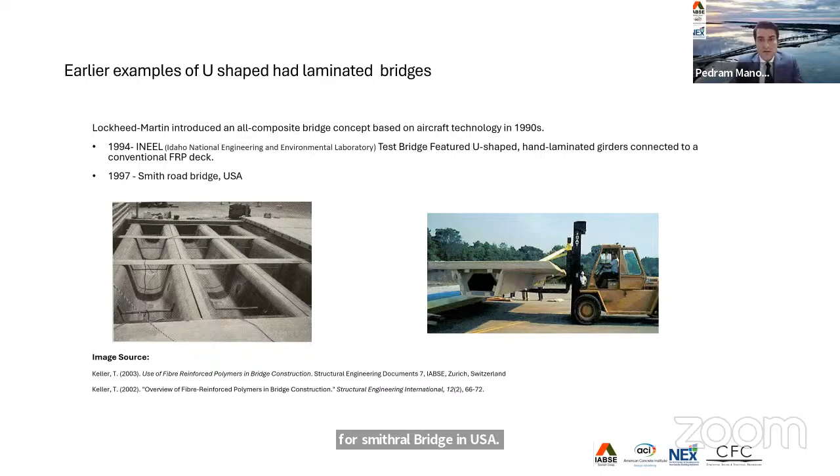So we used the same, more or less the same design, same approach. By the way, we will get to the FRP rebars too.

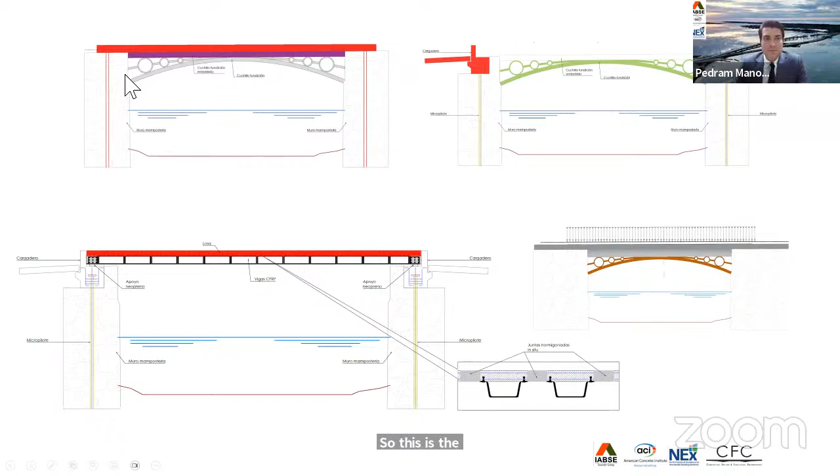This is the process we are going to follow. This is the old design, the old bridge. First micropiles will be installed, and then the abutments will be installed in a way that is not intrusive and doesn't add structural and construction load to the old structure.

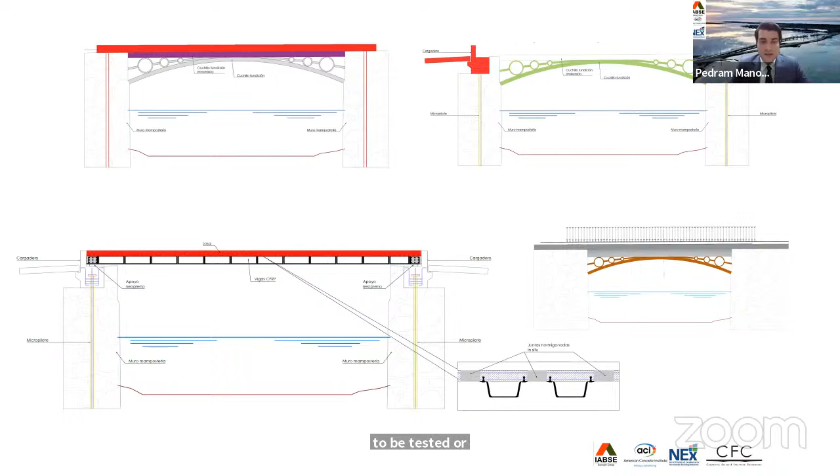The concrete deck installed in the 70s or 80s will be completely removed. At this stage, the arches could be dismantled and sent to be tested, or for their situation to be improved. They can be fixed, and then they can come back to the bridge, and the bridge will be active until it is finished. The final view, final aesthetic of the bridge will be the same.

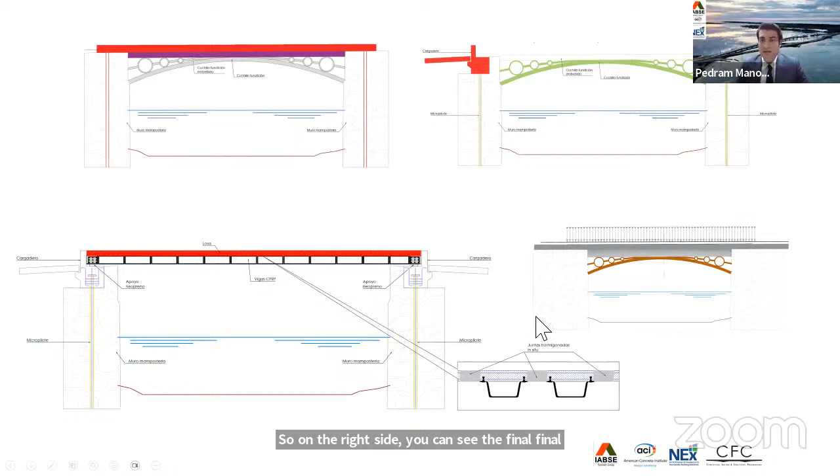On the right side, you can see the final bridge. Nothing visible, everything is the same. The new solution will be hidden inside the old design.

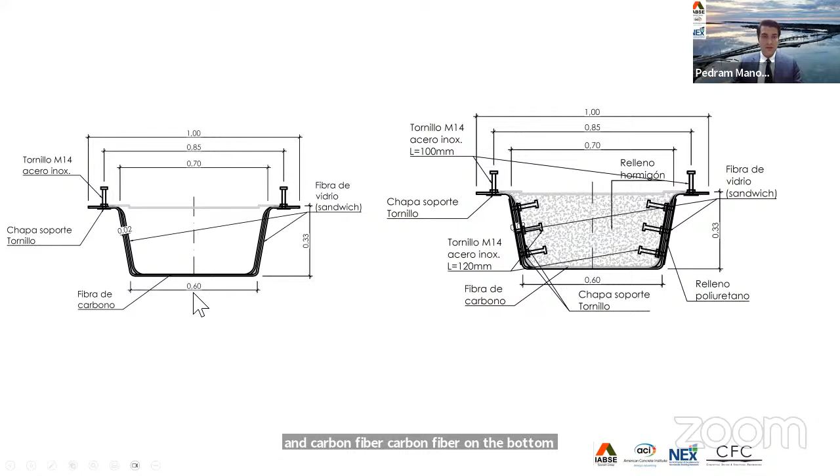Now let's talk very quickly about the cross section. This is a composite section with glass and carbon fiber on the bottom. Carbon fiber is only used at the bottom section because of its higher modulus of elasticity. It controls better the displacement and deflection of the deck, and also reduces the final cost of the product.

One thing that is completely new in this design is that the connecting studs are installed inward, and part of this section is filled with concrete. This is to increase the stiffness of the deck, which is integrated to the top slab. The concrete is filled in this first part, which is supported by a normal elastomeric bearing.

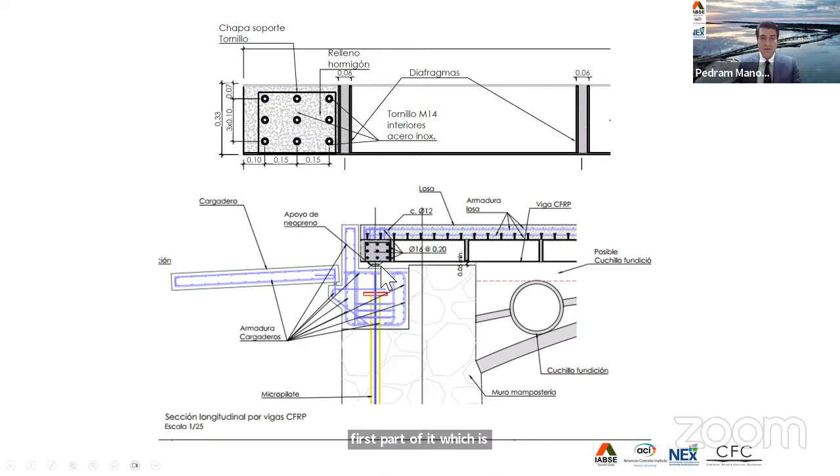As for rebars, we used FRP rebars - glass fiber rebars, everything is glass fiber in this case - because with that we could reduce the concrete cover, which Eurocode instructed to be higher. That number is so large that it makes the slab much thicker. With this, we have reduced the thickness, and actually we have a much lighter design. The slab is lighter and more slim.

So everything is done with - every reinforcement is done with GFRPs.

I guess I'll close with this. We have used this U-shape design to minimize the deck thickness and reduce the visual impact, so this historical heritage will always look the same. The GFRP rebars are resistant to corrosion, and because this is located near the sea, we have a slimmer deck.

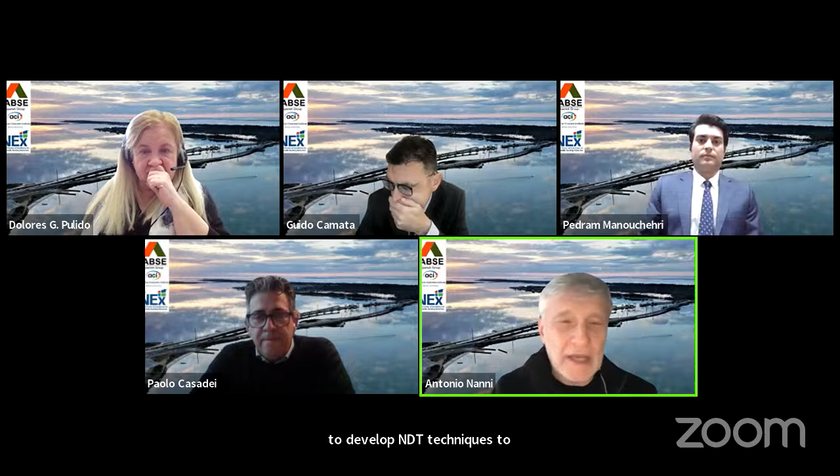This is a very important question. The traditional methods to identify steel rebars in concrete structures do not work with FRP. There is a lot of research, actually some funded by NEX, to develop NDT techniques to identify the location of the rebars. Why is this very important for the bridge community? Because, for example, if you have to core a slab, you need to know where the reinforcement is before you start coring. So excellent question, difficult answer for the time being.

There are companies that are working on this, in particular one coming out of Europe, Switzerland, Screening Eagle, if you want the name. But we are attempting to also address that very important issue, detecting the location of bars and size of bars that are embedded in concrete.